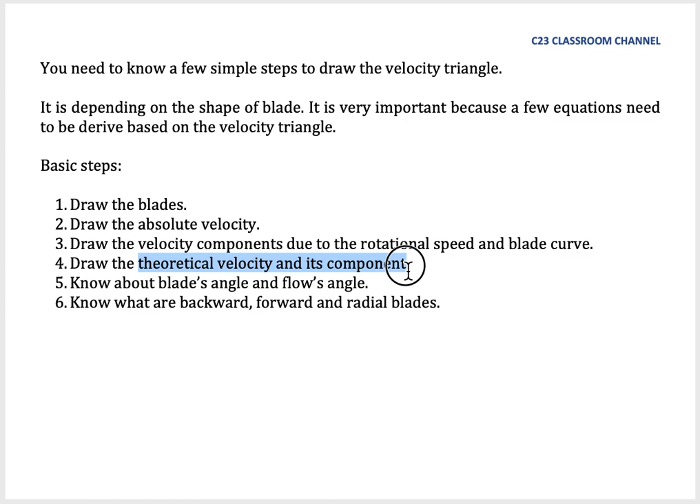So these are a few basic steps that you need to remember. One, you need to know how to draw the blades. And then we draw the absolute velocity. Then we draw the velocity components due to the rotational speed and blade curve. Then we draw the theoretical velocity and its component. And then we can determine the blade angle and the flow angle. And then we can draw the velocity triangle based on backward, forward or radial blades.

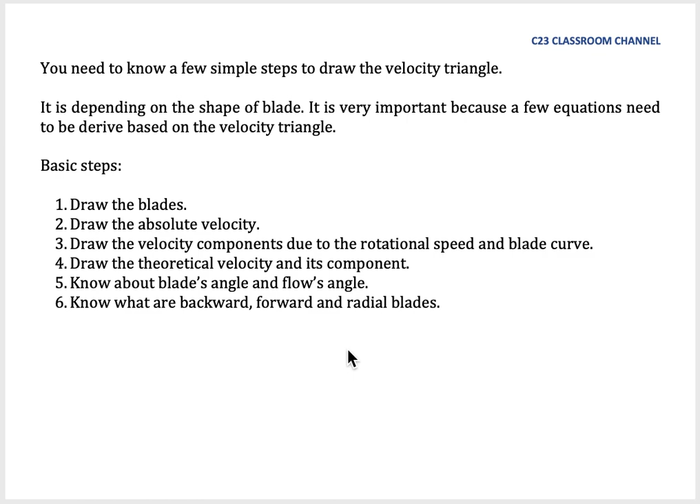First, you need to draw the blades. It depends on the question, because as I said, we have three types of blades: backward, forward, and radial. So how do we know which is radial, backward or forward? The idea is simple. First, you need to know the direction of your rotational speed. So let's say we have a rotational speed that rotates from right to left, counterclockwise like this.

If the rotational speed is counterclockwise like this, the water will also move counterclockwise. Then if we have a blade like this, just imagine that you sit on the tip of the blade here, facing the same direction as the rotational speed. You stand on the tip of this blade and you are facing to the left, because the rotational speed is counterclockwise. If the rotational speed is clockwise, you imagine that you stand at the tip of the blade but facing to the right.

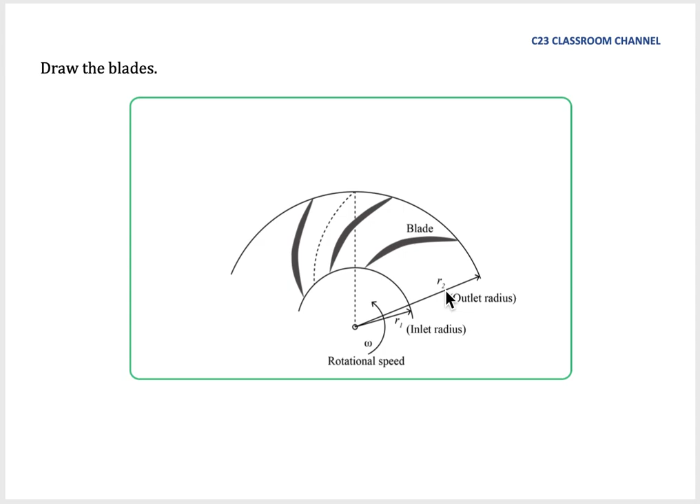I will talk about this later, but first we need to draw the blades, depending on the question, whether backward, forward or radial blades. Then we draw the rotational speed. It is very important. And then we need to draw the boundary of the shroud. The blade is on the impeller, on this circular shape. From the center to this line is the inlet radius, and from the center to this line is the outlet radius. We call the inlet radius R1 and the outlet radius R2. Normally, subscript 1 refers to the inlet and subscript 2 refers to the outlet.

Then we determine the blade angle, meaning the angle at the inlet and the angle at the outlet. The idea is simple. We draw a tangent line here, then we draw a line parallel with the shape of the blade, and we determine here is beta 1. Again, at the outlet, we draw a tangent line, then a line parallel to the blade shape, and we take this angle and call it beta 2. So beta 1 is the blade angle at the inlet and beta 2 is the blade angle at the outlet.

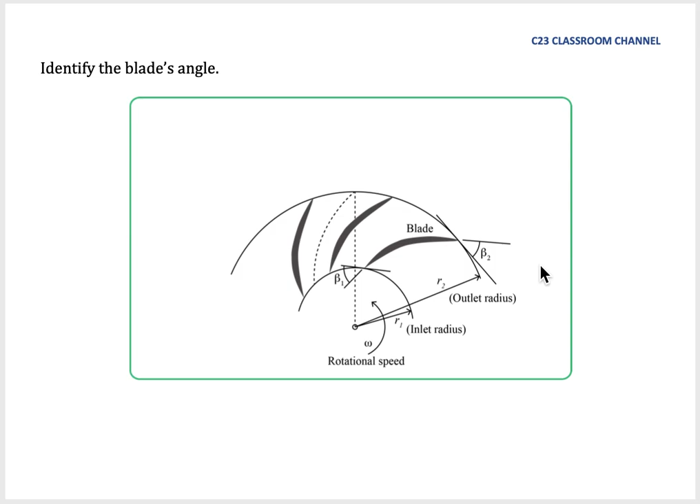Next, we learn about the blade angle. This is a very important step. The first one, you need to draw the absolute velocity. What is absolute velocity? Absolute velocity means the actual velocity of liquid traveling from the inlet here, the eye of the pump, to the blade area.

Just imagine that if the rotational speed rotates counterclockwise like this, the absolute velocity will flow like this. It is not a radial direction, not from here to here. I will explain it later. So it will flow a little bit slanted from the radius here. So you just draw it as V1 like this, and at the outlet the same direction as the inlet here, so from here to here, let's say.

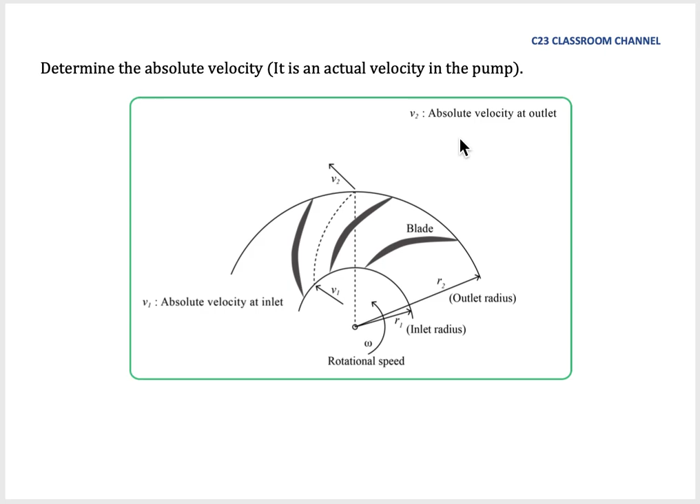So we label the absolute velocity as V1 and V2. V1 means absolute velocity at inlet, and V2 is the absolute velocity at the outlet. Next, we need to determine the angle of the absolute velocity. It's very simple. We have absolute velocity V1 here, and then we draw a tangent line to the circle here, and this angle is called the absolute velocity angle, or the flow angle, meaning the angle of the water flow to the blade.

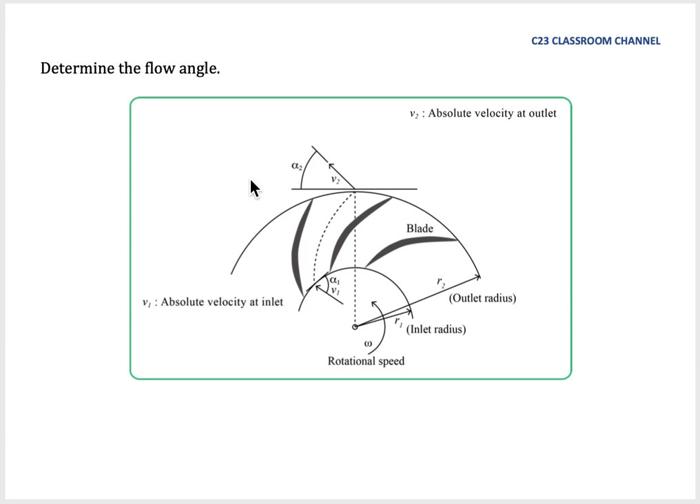And for this angle, we draw a tangent line here, and this is V2 at the outlet. So the angle here is labeled as alpha 2, meaning the flow angle at outlet. Then we need to draw two types of component velocity. One is the component velocity due to the rotational speed and the blade curve. So what does it mean?

For example, we have one molecule here just entering at the inlet of the blade like this. However, at the same time, the blade is moving counterclockwise because it rotates on its own shaft, so the blade is now moving here. And at the same time, this molecule will flow on the blade until this location. So in one motion, there are two movements occurring on this molecule.

Just imagine that this molecule enters the inlet of the blade, moves counterclockwise, and is now at this location. So if we split the direction of motion of the molecule here, we could say that this molecule is moved along this circular line because the blade is moved parallel with the rotational speed. So it's moved from here to here.

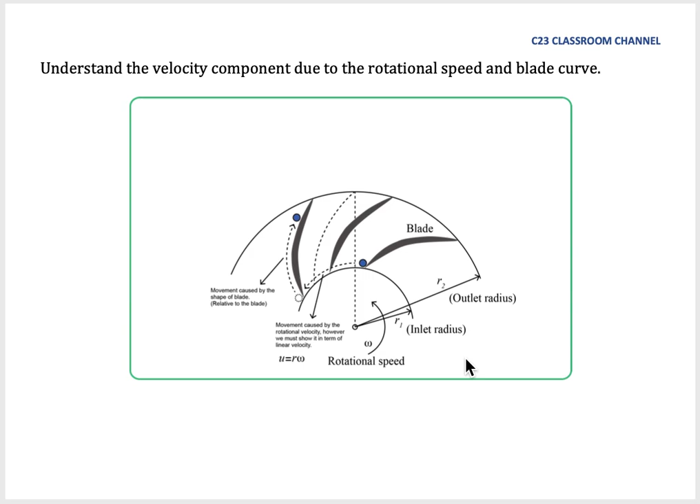Then, this is our absolute velocity. The absolute velocity is the actual velocity. So the actual velocity V1 can also be imagined as the resultant velocity at the inlet. Then we could split this resultant velocity into two component velocities: the component due to the rotational speed, which is U1, and the component that flows due to the shape of the blade, which we call VR1.

So we have U1, the tangential velocity at inlet, and VR1, where R means relative, the relative velocity at inlet. Relative means relative to the blade, and tangential because it moves in rotation in a circular shape. So at this point we take the tangential velocity. We draw a tangent line here and the velocity is here.

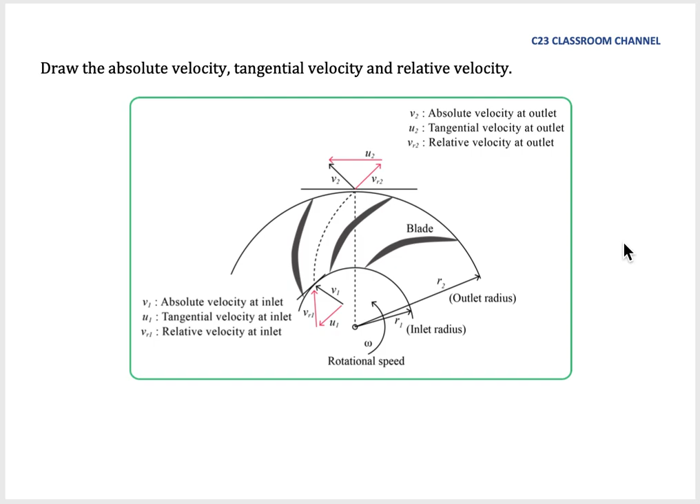Okay, now we forget about the U1 and VR1. We are focusing on another velocity component that relates to the theoretical. In the first session, when we drew the actual velocity V1 and V2, I asked you not to draw the velocity V1 or V2 here parallel with the radial. It is because in theory, the flow will flow in radial, because this is what we learn in ideal flow.

When you have a source, water coming from one single source like this, the water will flow in radial direction. So in theory, the water will flow in radial direction. So we could draw VF1 like this, the blue arrow, and at outlet we could draw VF2 like this, parallel to the radius here. However, in reality, we found that the flow will enter the blade a little bit slanted, like V1 here, and V2 here will come out a little bit slanted.

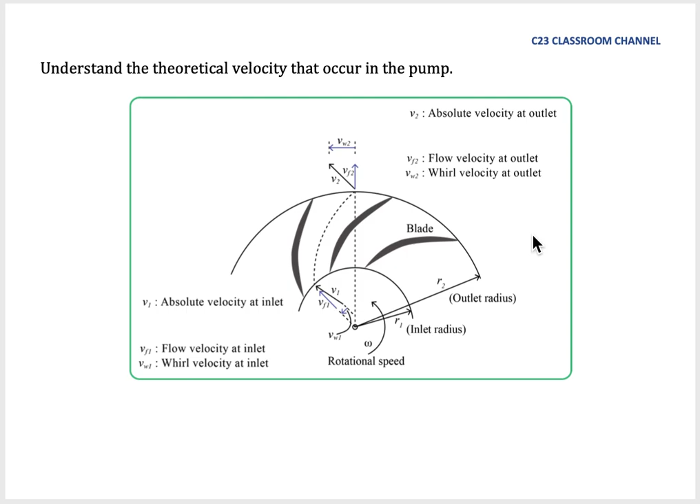So then, I hope you can combine both velocities that we have. We have actual velocity V1 and V2. We have component velocities VR2 and U2, and also velocities VF2 and VW2 at the outlet. And at the inlet we have U1 and VR1, and we also have VW1 and VF1.

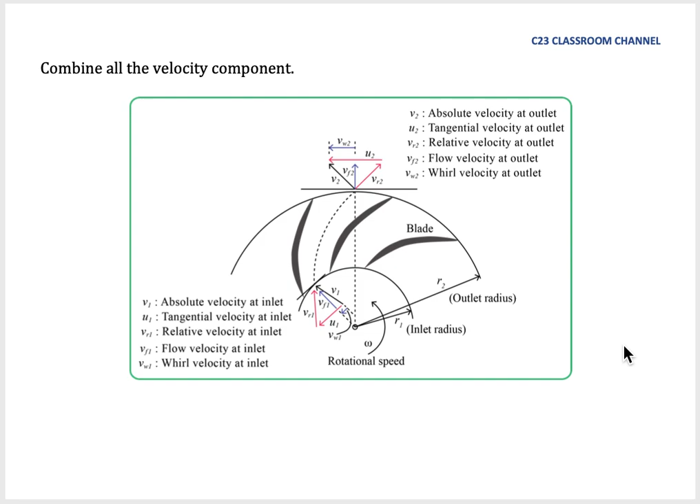So this is the close-up of the inlet velocity. Again, this is the absolute velocity. This triangle is for U1 and VR1. And this triangle is for VW1, and this is for VF1.